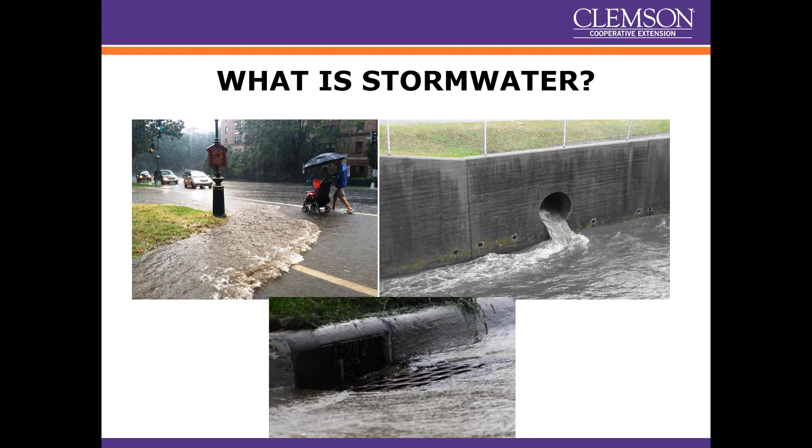So now let's look at stormwater pollution. So what is stormwater? We're talking about drainage and all this stuff. Stormwater is excess water. When it rains, a rainstorm, we have water that moves across the surfaces, either our yards or our driveways or roads, and it carries all kinds of stuff with it, and it becomes stormwater. And it usually flows into different drainage grates, street drains, stuff like that. And it can carry a lot of different stuff with it.

Now, why is this becoming more and more of a problem? Well, one, we're getting more and more urbanization, and as we do that, we're taking away more and more naturalized areas. When we have natural ground covers like forest and cropland, the rain can actually penetrate the soil profile, and we get almost 50% penetration, about 40% evaporation, and about 10% runoff. Look over here with urbanization. We get about 30% evaporation, maybe 15% infiltration, and we're getting about 55% runoff.

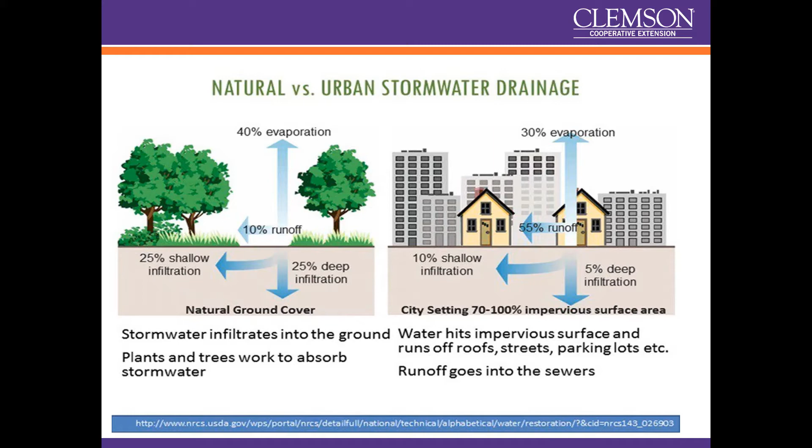When this water runs off, it carries a lot of different things. It's not just water oftentimes. It can carry pet waste, excess pesticides, excess fertilizers, which can cause problems. It can carry excess household chemicals. It can carry sediment, roof contaminants such as roof oils and bird droppings, things like that. So there's a lot of different things in stormwater that don't often get processed through the normal channels.

Now, what happens is, especially with excess nutrients, we can get excess nutrients flowing into water sources that can cause excess algal blooms. Some algal blooms are normal. We have what we call planktonic algae, which is good algae that bait fish feed on, and the predator fish feed on the bait fish. So that's a good thing. But we can also have too much algae build up, and we also have some bad algae like cyanobacteria that can build up with excess nutrients.

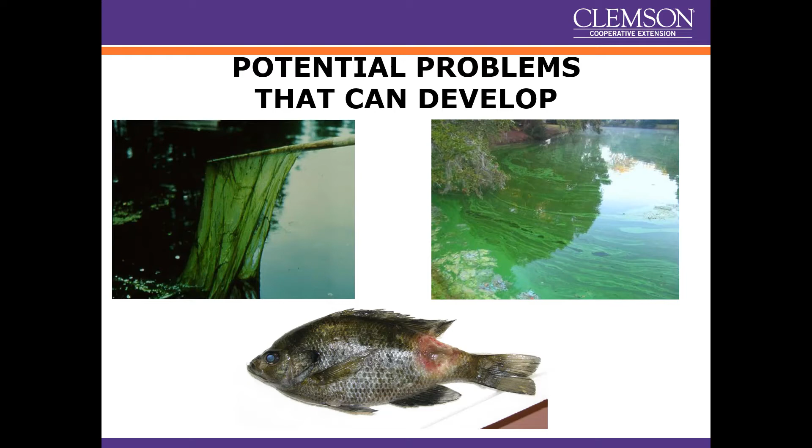What happens is they build up, they start dying because there's not enough space to occupy. As they die, they start to decompose. Bacteria decompose those old dead algae cells, and as they do, they consume oxygen. When oxygen levels drop too far in the water column, you can have fish kills. So there can be a lot of different problems with that. So it's important to always fertilize on a soil test and make sure you're doing your part for managing stormwater.

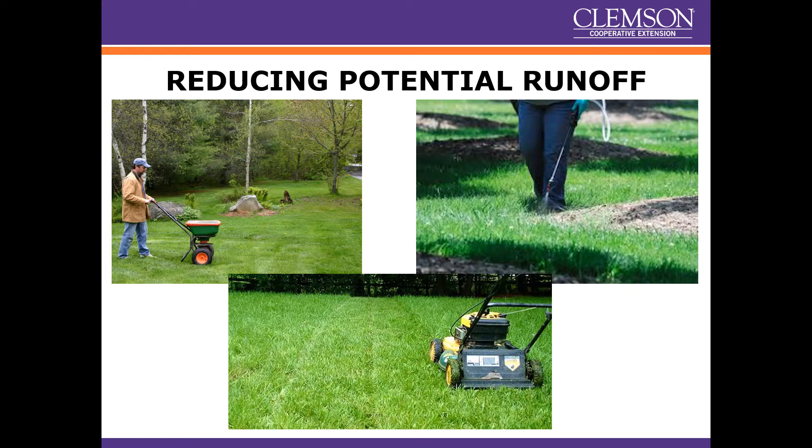So let's look at some ways we can reduce stormwater pollution. One of the things you can do is, again, always fertilize on the soil test. Recycle your grass clippings. Make sure you're applying pesticides correctly and at labeled directions, and not doing it when you're too close to a rainstorm. Overall common sense is what we're getting at here. And also keep grates and storm grates free of debris.

The idea is it would run off your roof or your yard and flow into the dry well. The excess water the dry well doesn't contain would flow out to a French drain system. What doesn't get filtered out through the soil profile gets discharged into the street. That way you keep your house and yard nice and dry, and keep everything away from your house. And it also helps with stormwater pollution, because all that excess stormwater can hopefully be filtered through the soil profile with that dry well.

Now you can go on different websites like NDS Drains, and they make the math easy. They have this little tool where you can pick your surfaces, pick an average rain, and then figure out, okay, I need so many dry wells to compensate for that much rainfall.

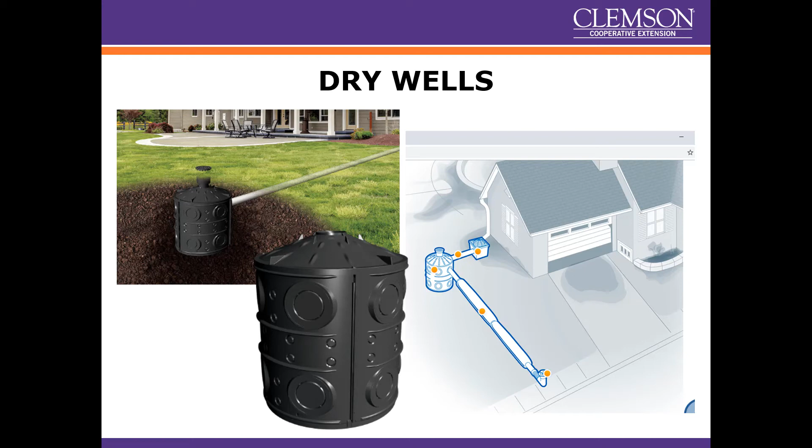Again, a dry well is basically a giant French drain; that's what this is designed to do. So you have stormwater runoff that goes into the dry well. All the excess water filters through gravel into the subsoil and goes back into the water table through infiltration. That way the water gets filtered, all the contaminants from stormwater get filtered out, and it's a lot better for the environment and a lot better for your home, because you're getting the water away from the yard, and you're also helping to reduce that contamination.

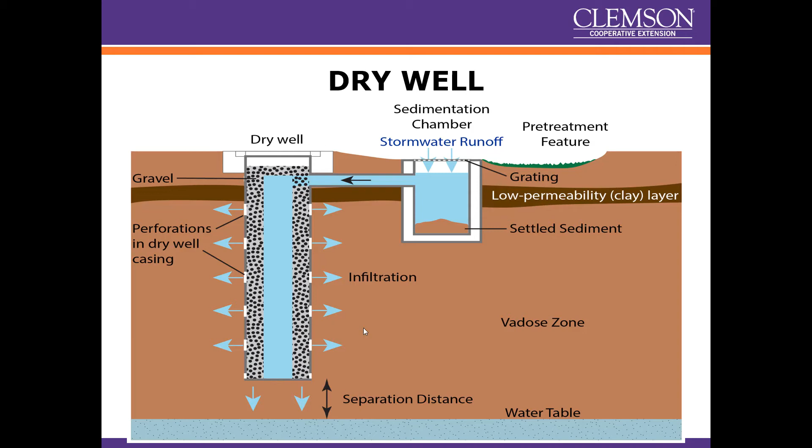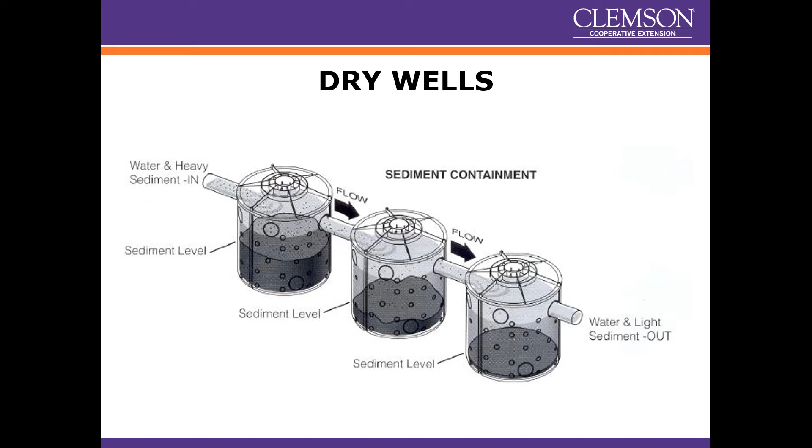Again, you can have multiple dry wells. Preferably these are installed by a contractor because this is going to require some digging. They also have to be cleaned out every once in a while. You'll have sediment that gets built up in there. You can use shop vacs, or you can have septic people come pump them out. So there's some maintenance to these, but they're really good products.

As I mentioned, NDS has a calculator that you can use. You can calculate how many dry wells you need, or you can use a drain calculator to figure out how much pipe or what size pipe you need. They make the math really easy. You just enter the amount of square feet you're trying to drain. You choose your coefficient based on the area, whether it's asphalt, roofs, or grass, and then you do your average rainfall, and they even include a map that tells you the average inches per hour, and they use a 25-year rain.

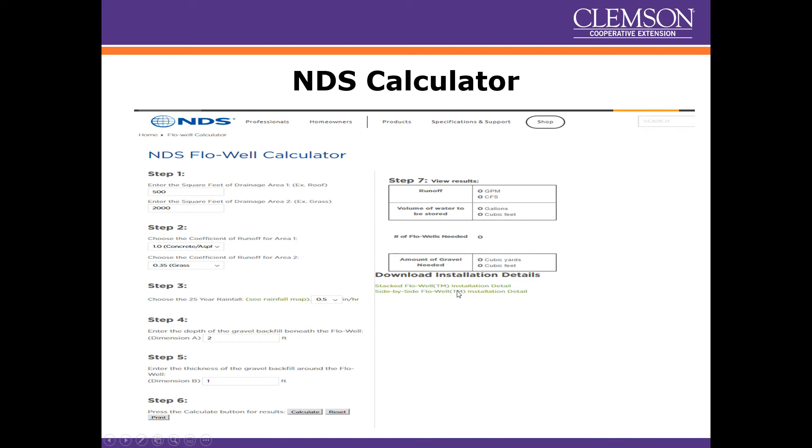And then of course it spits out how many dry wells you need. It spits out the average runoff that you're getting and the average gallons volume that will need to be stored. So it really makes it quite easy, so that way you can just go order what you need. It even tells you the amount of the gravel backfill that you need for the dry well. So that's very convenient. It makes calculations for cost analysis very easy.

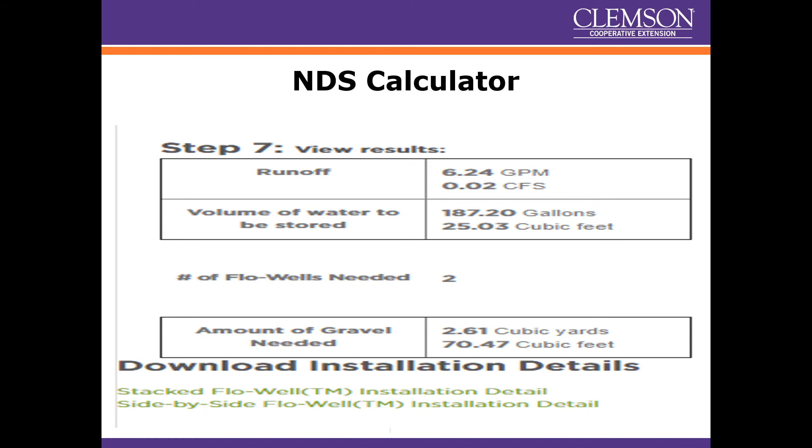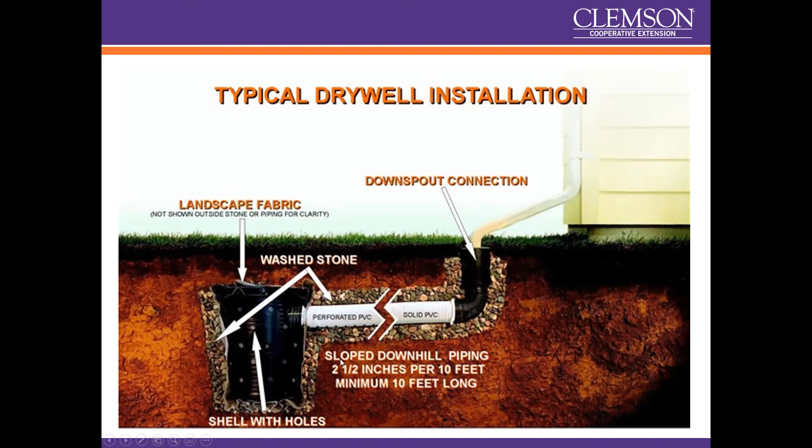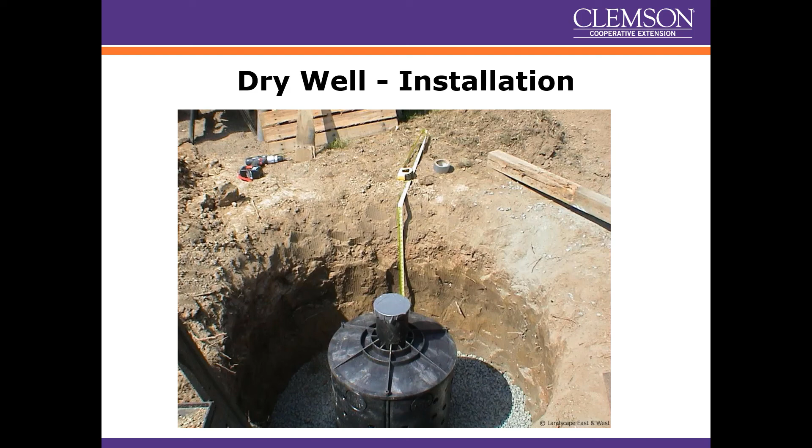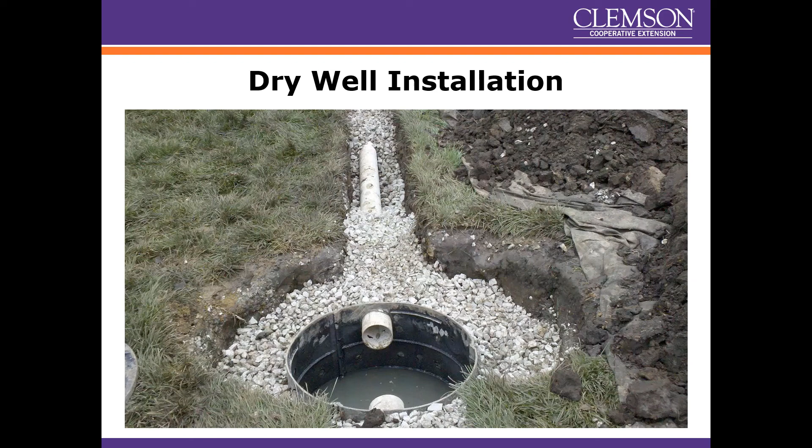Again, typical dry well scenario: from the downspout we connect a solid or perforated PVC pipe, and then the dry well surrounded by gravel. The idea is the water is filtering through the soil and away from our lawns and houses, but it's also being filtered to remove contaminants. So to install it, you dig a hole big enough to fit the dry well and the gravel backfill. Then you install the dry well, connect them with pipe if there's more than one, backfill with gravel, and then you can even test it using a garden hose.

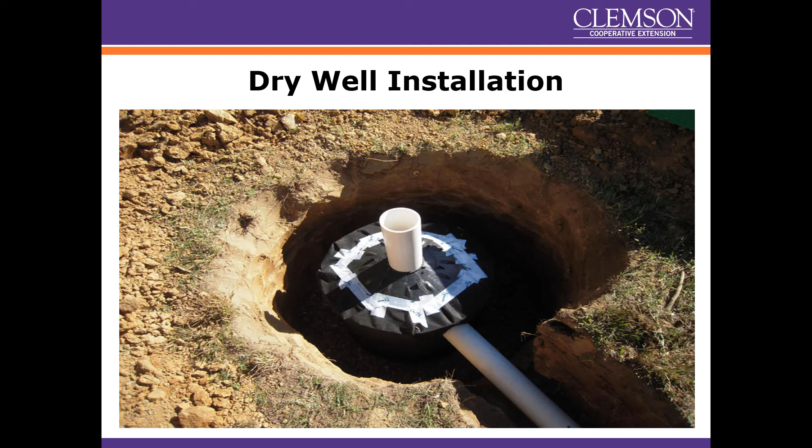Most of these have a geotextile fabric that you want to install with it, and you can even attach a surface drain on top to help capture water. So these are really versatile products that you might want to seriously consider, and a lot more stormwater managers in counties are recommending these to contractors for larger developments, like parking lots, and for urban and suburban planning. They're really trying to get away from retention ponds and get more filtering through the soil profile.

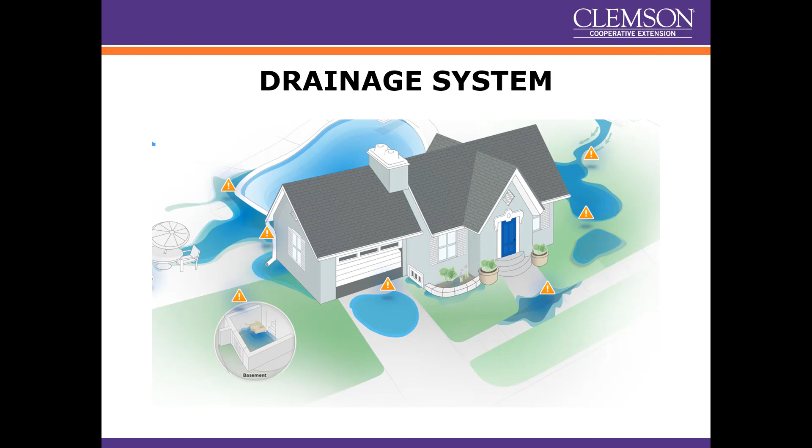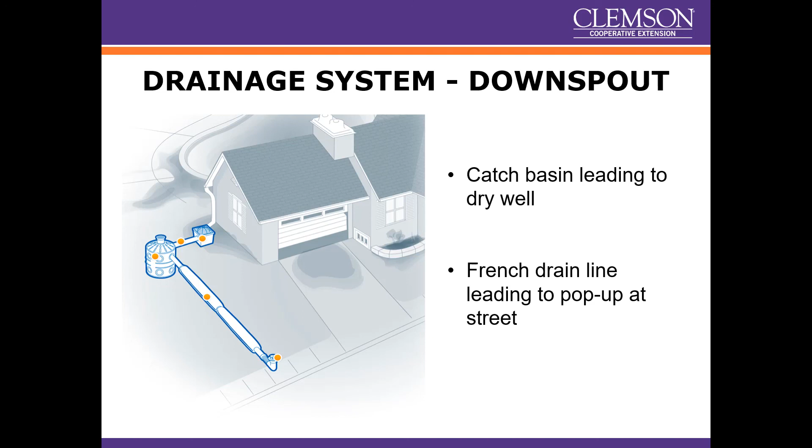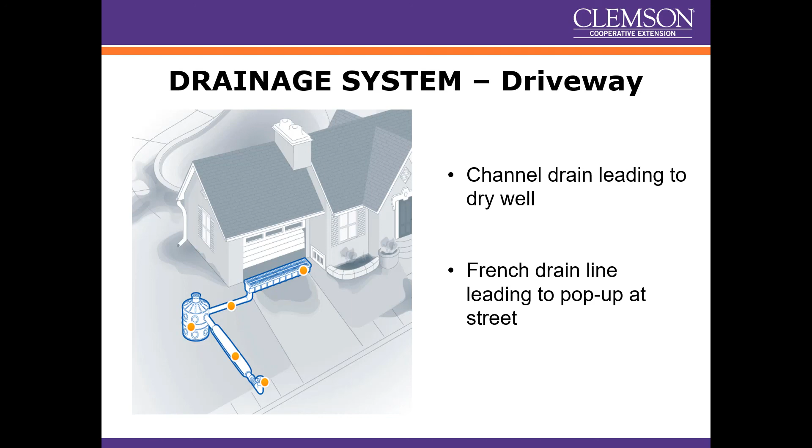All right, so let's tie it all together now with stormwater management in the home landscape. You can go on websites like NDS, and they have these handy charts that you can use. So let's say you have excess water on your downspouts and you're trying to figure out what to do with them. You can use a catch basin leading to a dry well, leading to a French drain. For your driveway, you can connect the channel drain to the same dry well, or tie it into the French drain leading to the street.

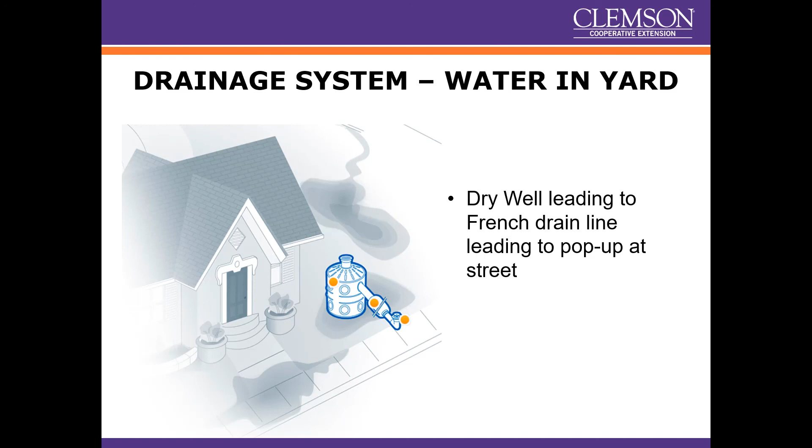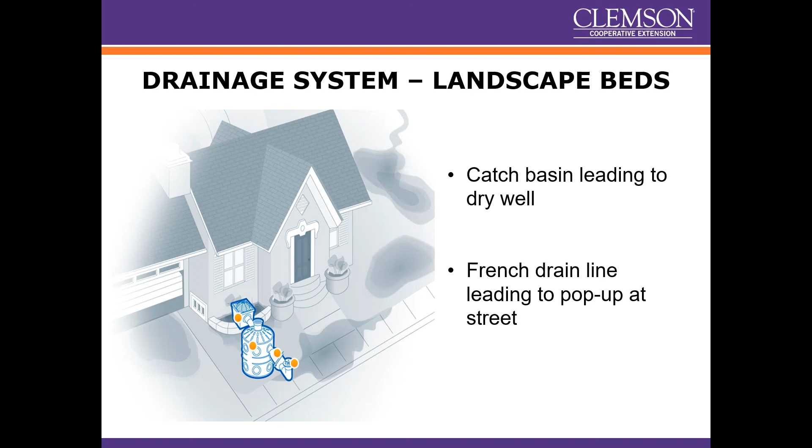If you have water in your yard, you can do simple dry wells or French drains. With landscape beds, you can add atrium grates for catch basins, and again lead those to dry wells and French drains. So you can see how it all connects, and you can really make a drainage system work for your entire yard and keep your yard and your house foundation very dry and very safe.